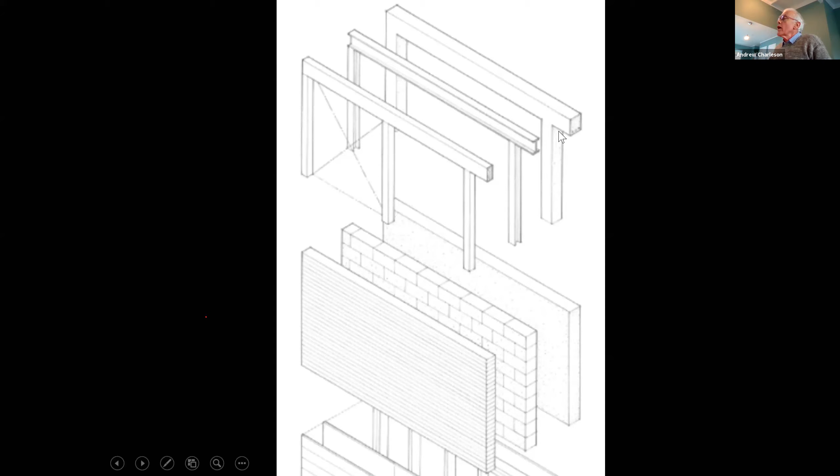And finally, we've got the structure here in reinforced concrete: a reinforced concrete column, a reinforced concrete beam.

So these structures of columns and beams are the most simple structures that you can use to resist gravity load in your two-story house.

Now, of course, on top of each of these structures you will need a floor slab, and I'll come to that soon, so that the beams of each of these structures will support the floors that you will also be designing.

So one of the very popular structural systems to resist gravity loads throughout the world is the frame system, columns and beam. This is a system that you may want to use in your design—it's entirely up to you.

The other most popular system in the world for resisting gravity loads in buildings are load-bearing walls, and there you can see three load-bearing walls.

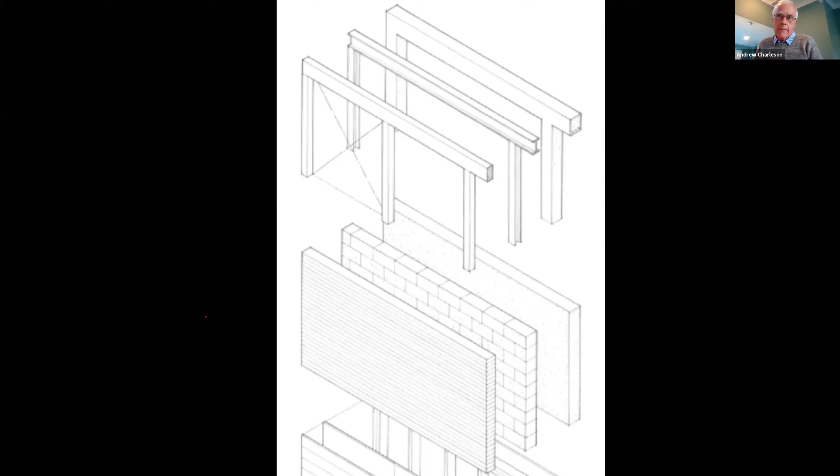Now, also from Ching, here is an example of using columns and beams to create frames. This diagram is a little difficult to understand, but basically we are looking up underneath a floor slab, and here is a column.

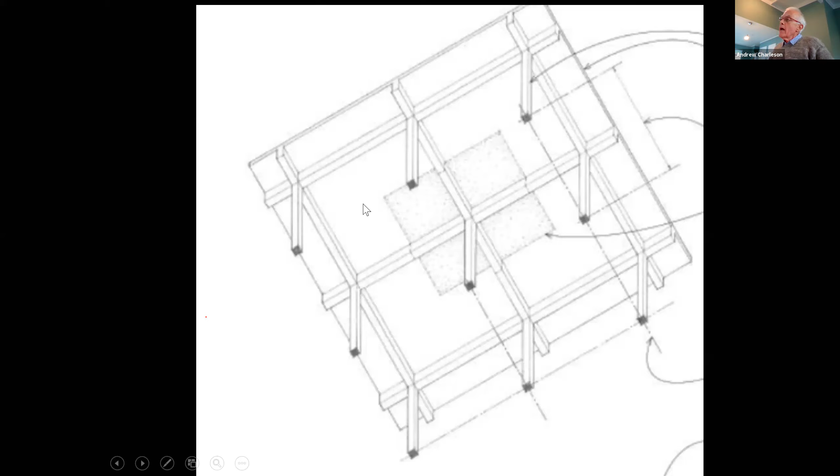These are the beams running between the columns, and this is the floor slab spanning between the beams. This is an example of using these frames on a square grid.

Now, often architects use square or rectangular grids to lay out their columns and beams.

And usually they prefer square or rectangular grids because that makes it easiest for construction. Contractors like square or rectangular grids because it's the easiest to build. But as architectural students, you have to be critical of that.

Remember, you are not designing your building for the contractor. You're designing your building for your client. And therefore, the grid should serve your program and your design concept.

I just want to tell you that the famous Japanese architect, Toyo Ito, in one of his buildings, used curved grid lines. Imagine that, all the grid lines were curved. It would have been a nightmare for the builder, but the result is an amazing piece of architecture.

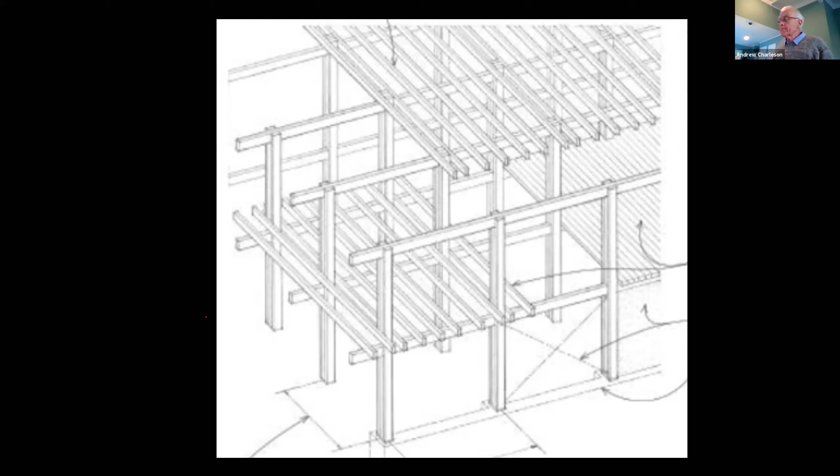So then we come to the question of how we will lay out our vertical structure, our columns. And as the designer, you have a huge range of choices.

We could start by having your structure with many columns closely spaced, and they can be uniformly distributed throughout the plan of the building.

Like, for example, you could have closely spaced columns just running along these lines, and you could have your flooring running this way.

In other words, you do not need beams running this way. Or if you wanted to, you could have your columns on a square grid like this, with beams connecting each column, and these areas would be your floor slabs.

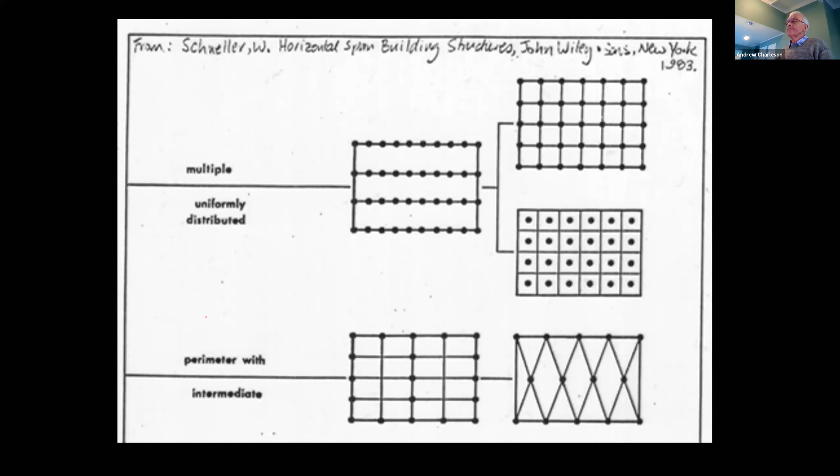Here are my final examples or possibilities. If you wanted to, when you are designing your building, you could have all your vertical structure on the perimeter. If you wanted to, you can. And so what you would do is have your columns just around the perimeter.

And then you would have beams running across your building, and maybe along your building, to support your floor slabs and your interior walls.

Or if you wanted to, you could have just 4 columns in your building, in your house project. Imagine that, just 4. That would be amazing. And that could be a very good idea if, for example, you were interested in maximum transparency.

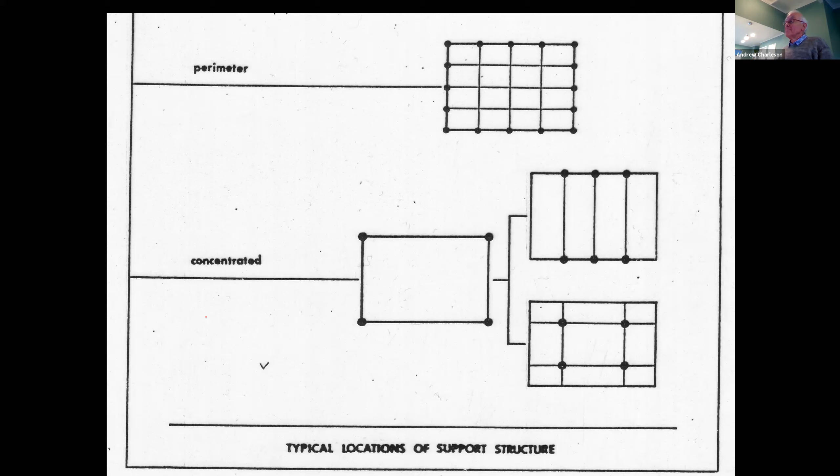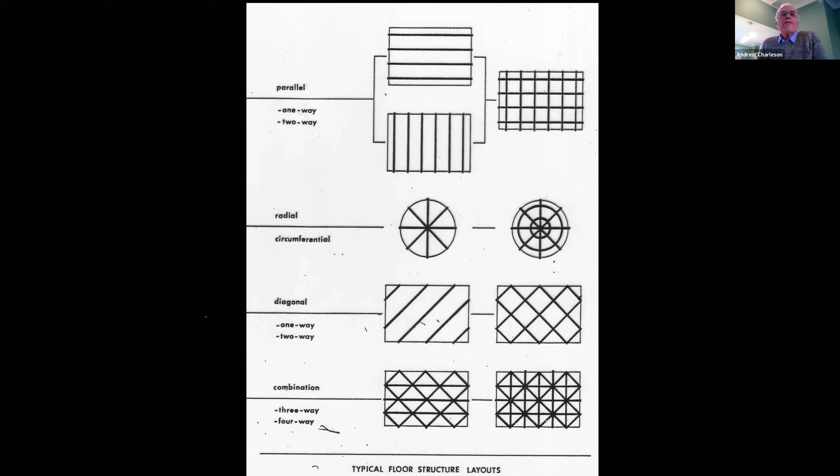And here are some other ideas in terms of beam layout. And you can see that it's possible to have all sorts of different layouts. Like say, for example, you are designing a circular house.

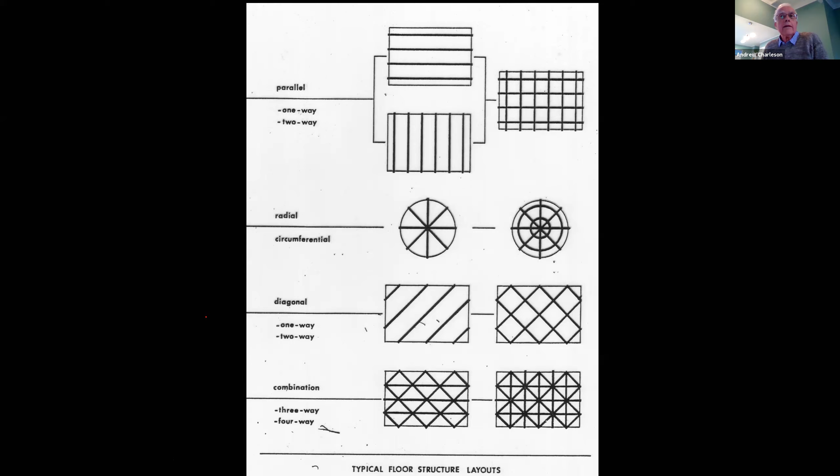Well, you could have a central column and columns on the perimeter, and you could have radial beams. And so each of your floor slabs would be designed like a triangle in plan. You'd sort of have triangular floor slabs.

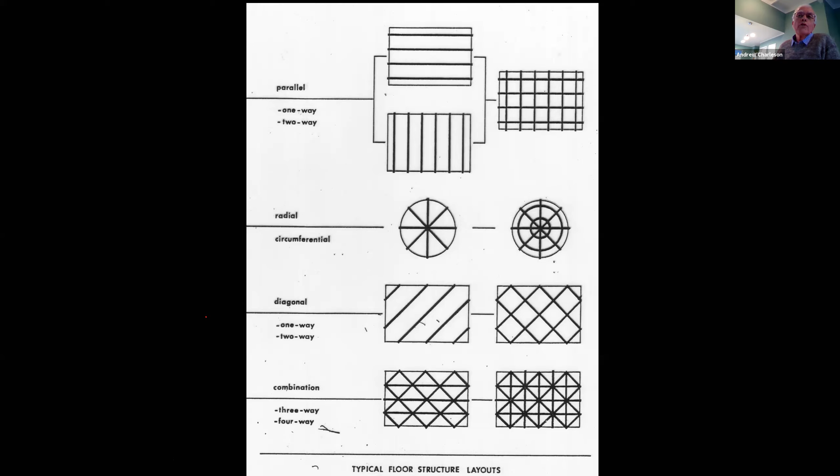And if you wanted to, there are other options for you to design your beams and columns. And so before you consider any of these, you ask yourself about what your design idea is and what your program is.

Now, this is a question that is just so important for each of you, because as architects, you've got to show the beams of your building in cross-section and in elevation. And so you've got to know what the depth of your slabs and beams are.

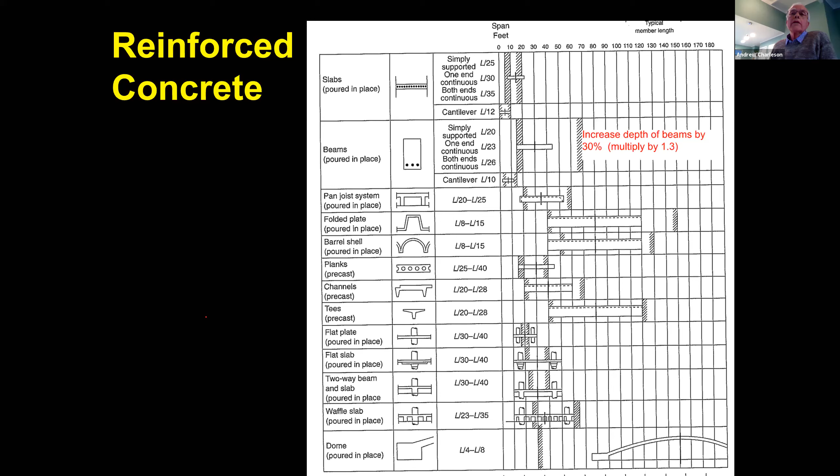Now, architects usually go to a textbook, and in many textbooks on structures, the authors present tables like this that give architects the approximate dimensions.

First of all, let's look at the slabs. Sorry, I've got to go back. So you need to know how thick your concrete slabs are going to be. So if you have slabs that are cast in place, poured in place, or cast in situ, that's the reinforcing steel in the slab.

If the slab is very simply supported, then the thickness of the slab is the span divided by 25. And I would suggest that is what you use in your design. Don't worry about this, it's a bit complicated. Whenever you have a floor slab, its thickness is the span divided by 25.

So if you have a slab spanning 5 meters, it will be 20 centimeters thick. If you have a slab spanning 2.5 meters, it'll be 10 centimeters thick or deep. And so that is the simple rule of thumb. That is all you need to know to work out how thick your slabs are.

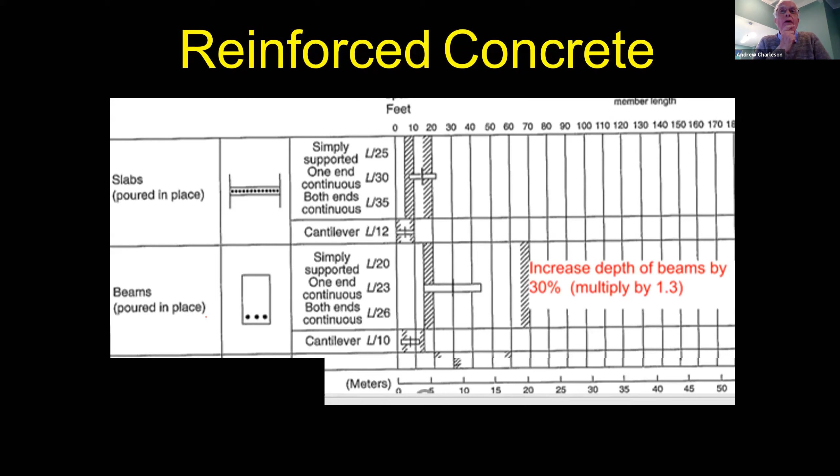I'm sometimes confused about the table, how to read it, like this one, for example. But in the book, on page 99, about the spanning system, the table is like... maybe I would like to share screen? Yes, okay, I will stop Andrew's share screen, and now you can share your screen, Shahla.

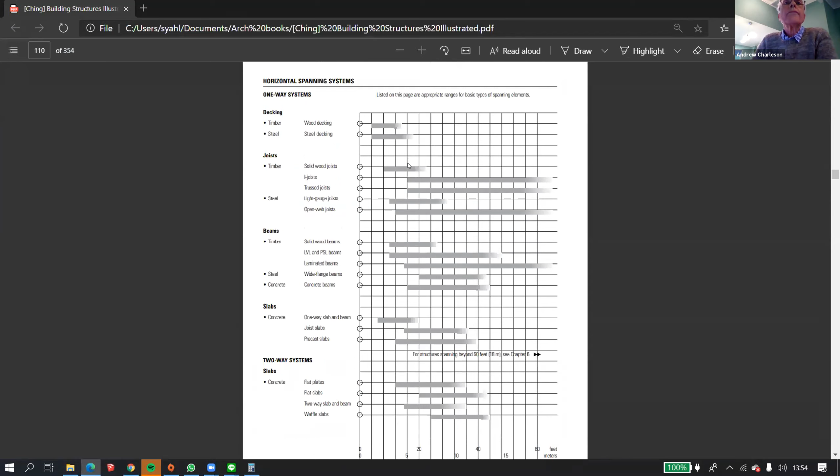Oh yeah, thank you, ma'am. Like this one, Mr., I'm still not really understanding how to read this type of table, because it would be really helpful for me in deciding about the spanning maximum and minimum distance. Yeah, that's my question.

Thank you. Okay, well, thank you. That's a really terrific question. Could you just show me the title of the diagram?

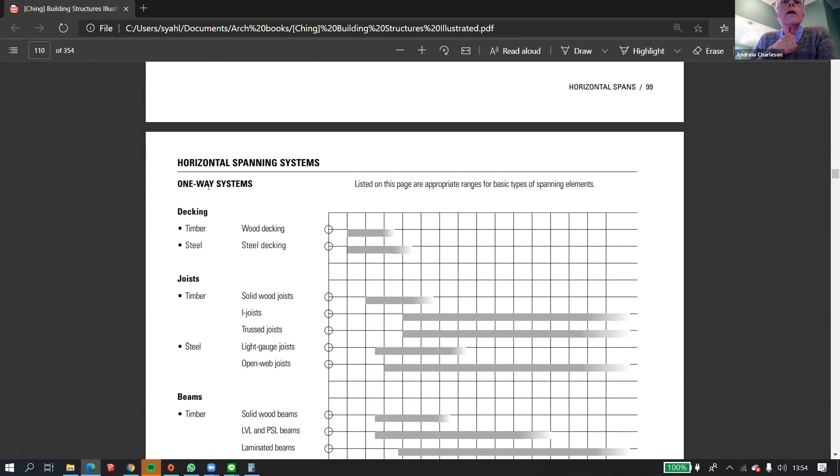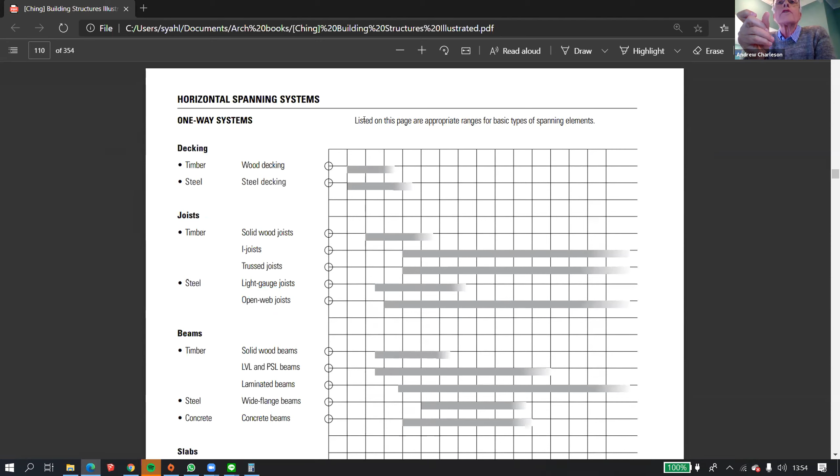So this diagram gives you the approximate ranges for each of the structures. So if you look at concrete beam, if you can scroll down a bit to concrete beams, yeah, that's great. Now you'll see there that under concrete beams, you've got that grey line. That grey line represents the sensible limits of using concrete beams. So it's saying that if you're using concrete beams, they should be no shorter than about 5 meters, and they should be no longer than about 13 meters, which is what I was saying before.

So, like take concrete slabs, say one-way slab and beam, or above, concrete slabs. Atasnya?

Yeah, there, slabs there. Concrete, one-way slab and beam. Yeah, that's it. Well, you see, it typically should be in the range of about 2 meters to about 6 meters. Because if it's spanning further than that, it'll be too thick and deep and heavy. And so this is like practical guidance for you.

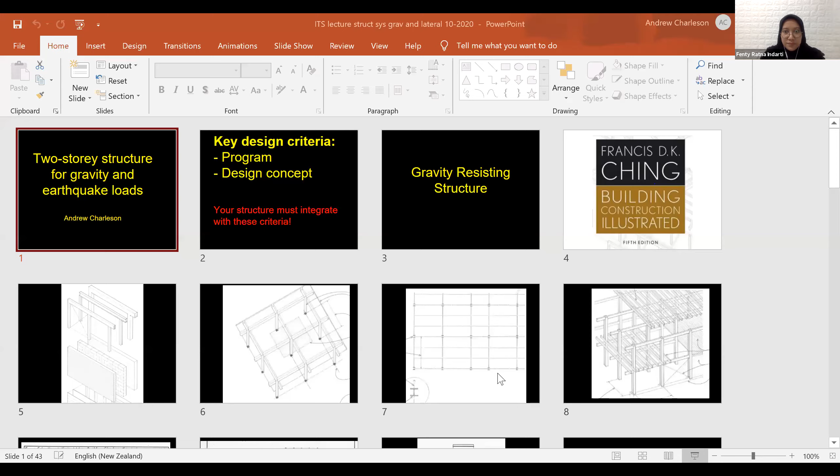Okay, so now I'm moving on to the more difficult part of the structure of a building, and that is for it to resist horizontal loads like wind and earthquake. In Indonesia, your wind loads are not so serious, so the big problem for you is designing against earthquake.

I'm sure you are aware of some recent earthquakes in Indonesia that have caused many buildings to collapse, like for example on Lombok and Palu, and other areas of Indonesia. The only area in Indonesia that is quite safe from earthquakes is Kalimantan. But Sumatra, Java, Bali, Nusa Tenggara, Sulawesi, Irian Jaya are very seismic areas. It's so important that we design our buildings so they won't collapse in an earthquake.

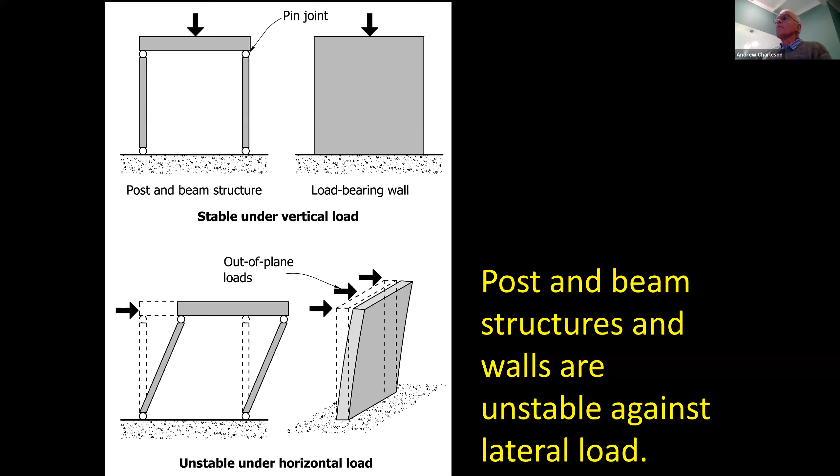Now, as architects, you have three structural systems that are suitable for resisting earthquake load. Just three. You have shear walls, which are the best system. You have braced frames, which are like triangulated frames. And finally, you have what we call moment frames, columns and beams, like a framework.

As an architect, you have to choose one of these structural systems in each of the primary orthogonal directions in your building plan, and you can have as many elements as you need. For example, in this building here, I am using shear walls in both directions. In the X direction I've got 2 shear walls, and in the Y direction, these 2 walls.

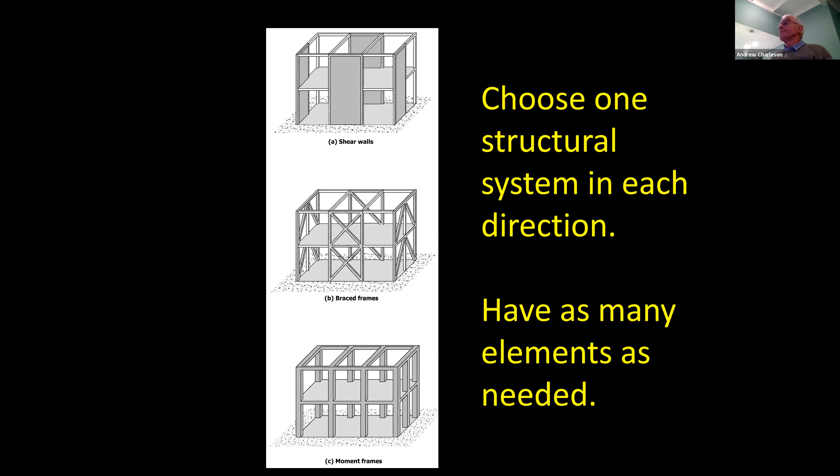Now I'm going to talk briefly about each of these structural systems. This is the best structural system. It's potentially the strongest and the safest, shear walls. It's very important that the shear wall starts from a strong foundation and rises continuously up to roof level. Most shear walls in the world are vertical, but it is possible to have them slightly inclined.

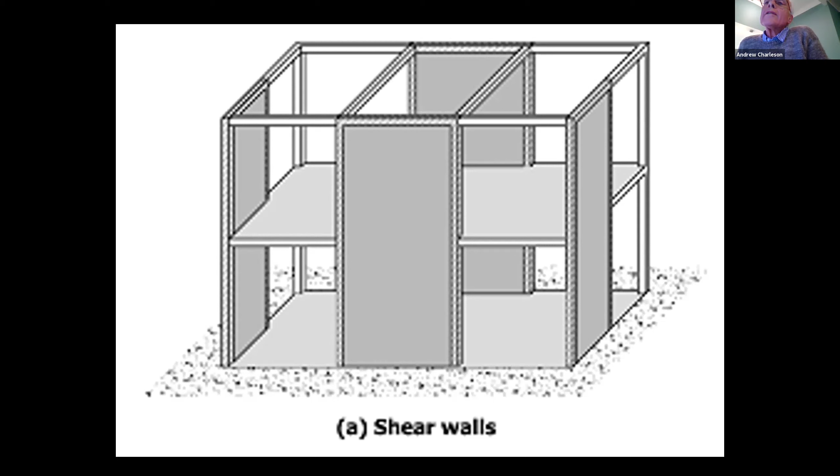Have you heard of the architect Zaha Hadid? She would never use a boring shear wall like in my diagram. She never did a shear wall like that. All her shear walls are slightly inclined because she is so interested in communicating the idea of dynamic. So I'm showing you some very boring shear walls today, but I want you to transform them and make them more interesting according to your design idea.

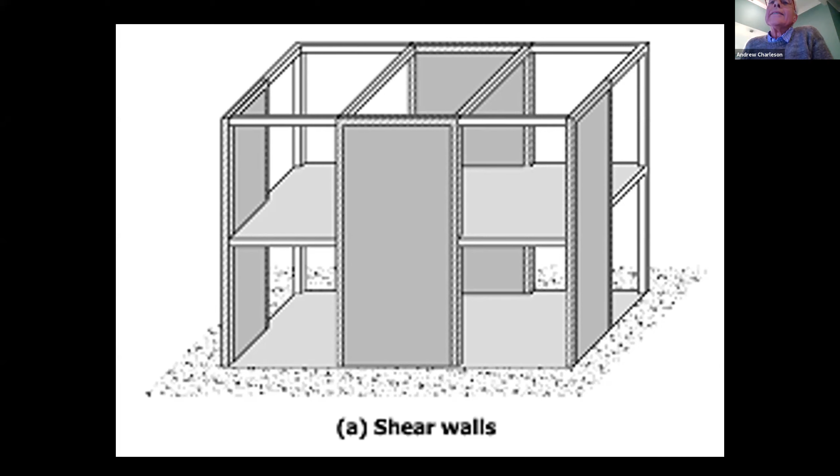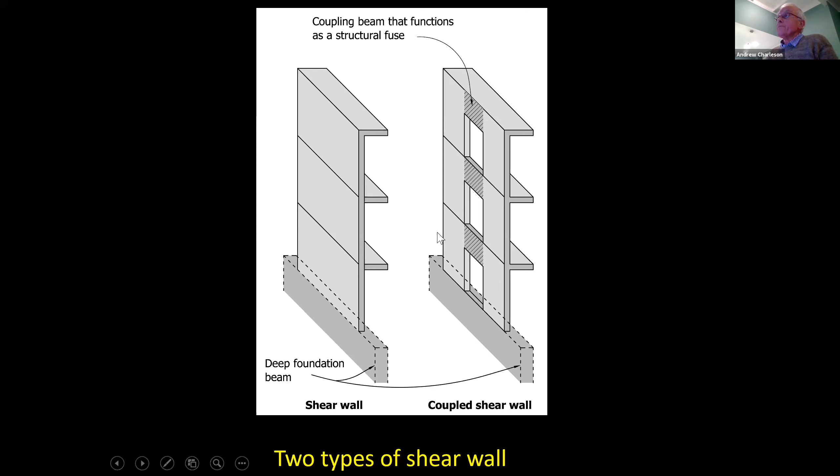In countries like Indonesia, a very common type of shear wall that is used for housing, say up to 2 stories, is called confined masonry shear walls. And many houses in Indonesia rely on these types of shear wall for their earthquake resistance.

In confined masonry shear walls, the masons build the masonry wall and then the reinforced concrete columns are cast, and then the tie beams and the floor slab. Confined masonry walls are really good for low-rise construction to resist earthquake. Really good. And as I say, that is what is used in many houses in Indonesia.

The alternative type of construction is to design reinforced concrete frames, beams and columns, and then after the concrete has hardened, after the concrete is set, then you come and put infills in, infill walls. Now, this type of construction is more dangerous because in an earthquake, the infills can fall out and kill people. And you see that many times after earthquakes.

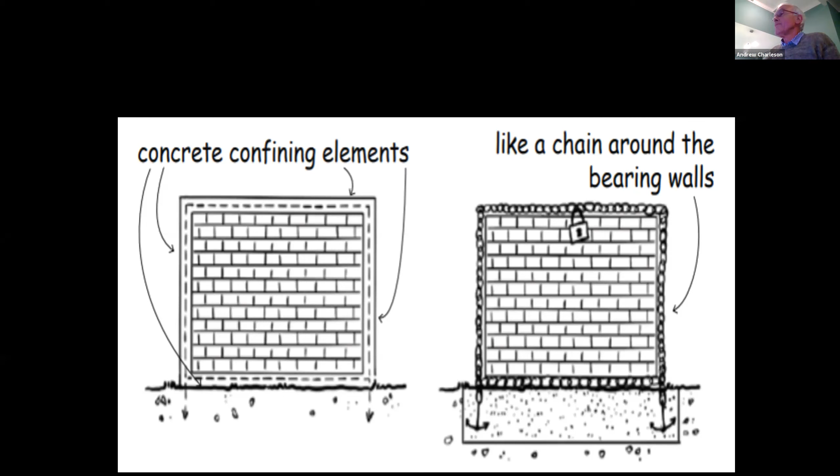So the tie columns and beams are absolutely essential. And so this is a very simple confined masonry house. Here is a tie column, here's the tie beam, and another tie column. And your masonry is actually load bearing for gravity. So the beam is not going to bend. It's there to help resist the earthquake forces, because the weight of your floors will be taken through the masonry primarily. This is how, as I say, most Indonesian houses are designed.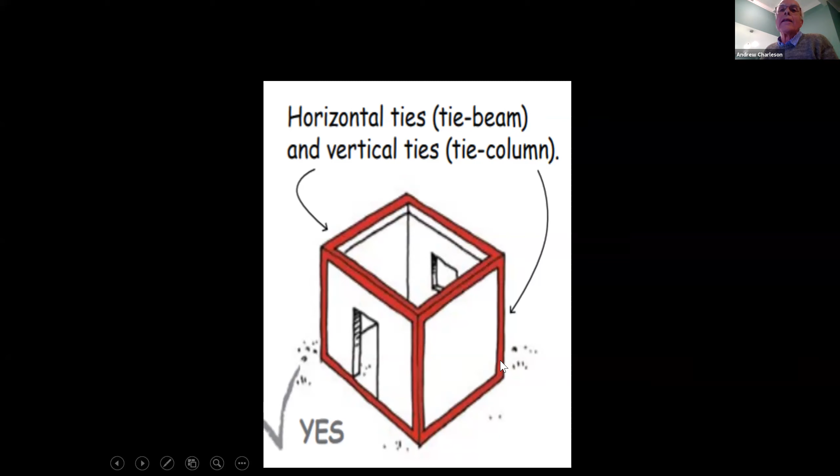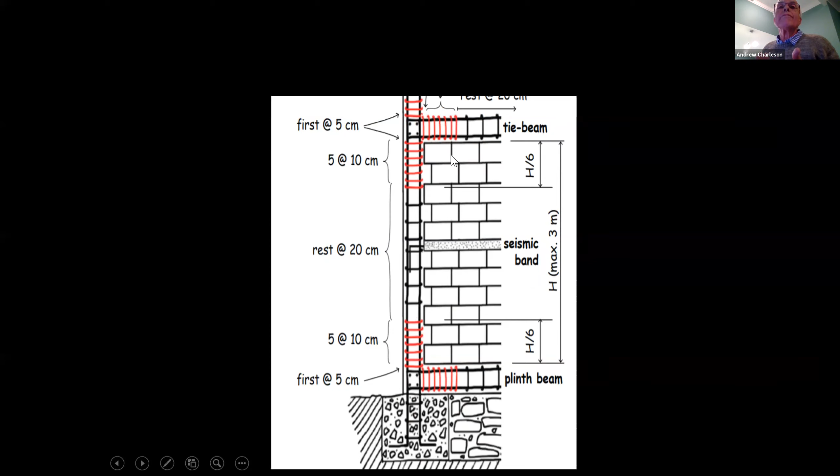And so this is the section through the foundation. You call it, well, just the foundation beam. There might be a plinth beam. Here's a tie column with reinforcing bars with special sengkang or ties. Here's the next beam up here. But anyway, you don't need to worry about these details. This is not so important for design and construction, I don't think.

And so after the walls have been laid, after the masonry has been laid, here are the concrete columns about to be cast. Here's the formwork for the column and the beams. And here is the floor slab will be poured across here, or the roof slab.

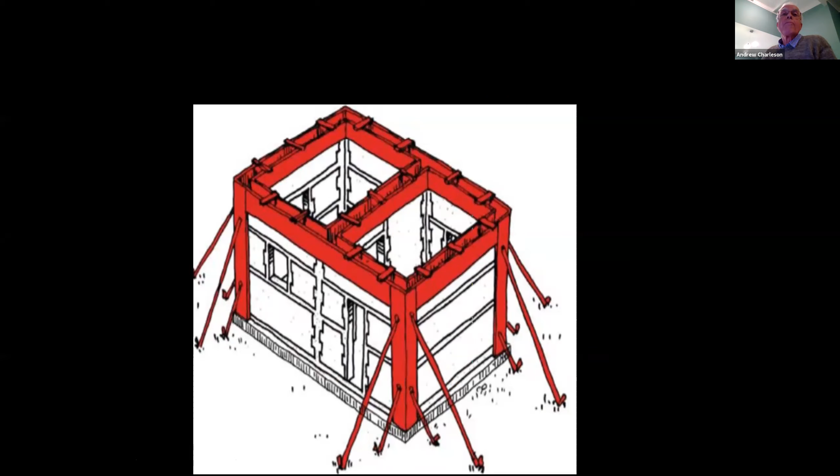Here it's going to actually be, I think, a 3-storey confined masonry building. It's a university hostel building. There are tens of these buildings in India.

You can see the masonry and the reinforced concrete columns. Here the wall has been laid by the masons. All the bricks are there, and the next stage is to cast the column and the tie beam on top. So this is a very strong shear wall, three stories high.

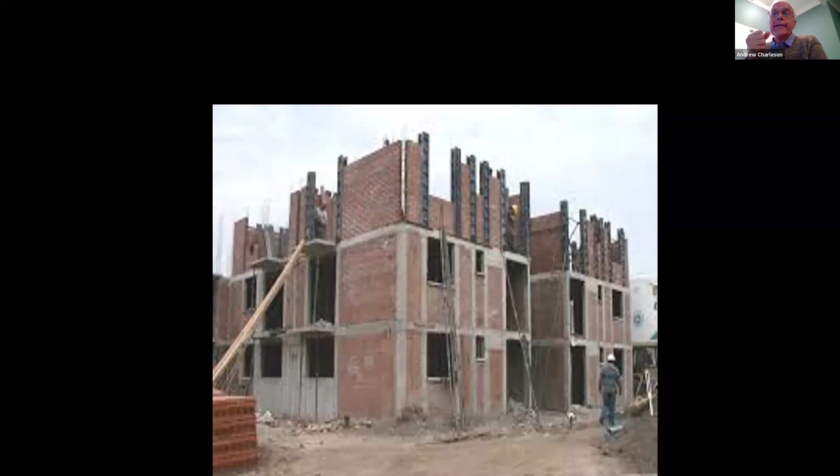Here's some buildings, some of them I think are from Indonesia. This is probably an Indonesian building. Here the bricks, a horizontal lintel tie, the tie column and the floor slab and tie beam at the top there. This is the type of construction you will probably see if you visit a building site around Surabaya. That's my guess, but maybe you'll have some questions about that.

Oh, this is an Indonesian house. This is Pakistan, and the others are from Pakistan. But this one is an Indonesian house. The bricks, the confining members create the shear walls.

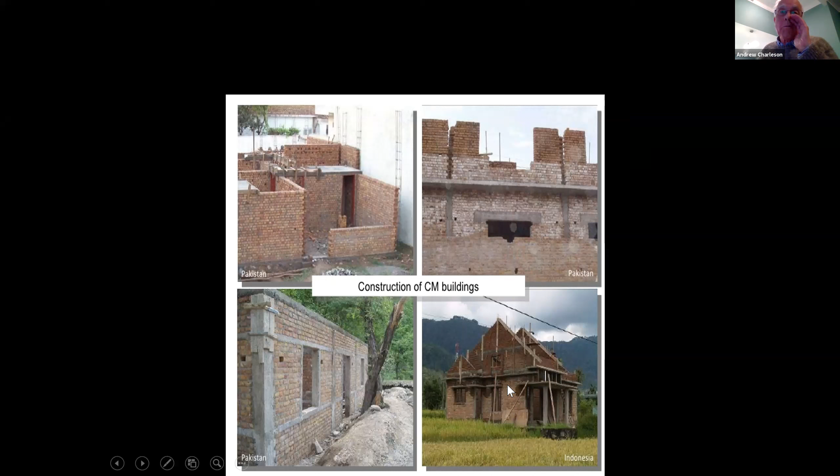In an earthquake, the earthquake acts at the floor levels mainly of a building. The earthquake shakes the building horizontally, and the shear wall resists the earthquake by forming diagonal compression struts like this in the wall. So during the earthquake, force in this direction pushing from left to right causes inside the wall a band of compression resisting the earthquake force, and at the same time there'll be tension in this column.

It'll actually go into tension just for those seconds during the shaking. After the shaking, there won't be any tension in that column, it'll have some compression. So the masonry wall transfers the earthquake force in compression down to the ground, and when the force is in the ground, the building will be safe.

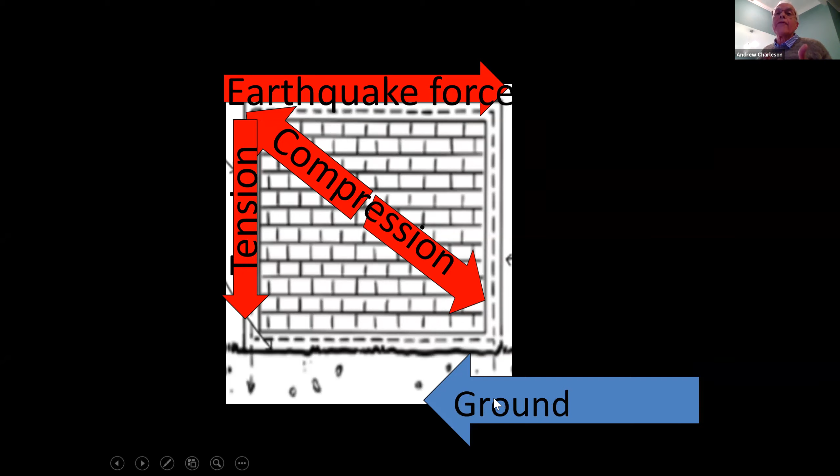Now, if you want to use a confined masonry shear wall, it's very important to have no openings, no windows, no doors in that particular shear wall. Otherwise you cannot form the diagonal compression struts. So some of your walls are not allowed to have any big openings like this, just some of them. Many of your other walls can have openings, but the walls that are meant to resist the earthquake must not have openings. Otherwise they're too weak and they will break.

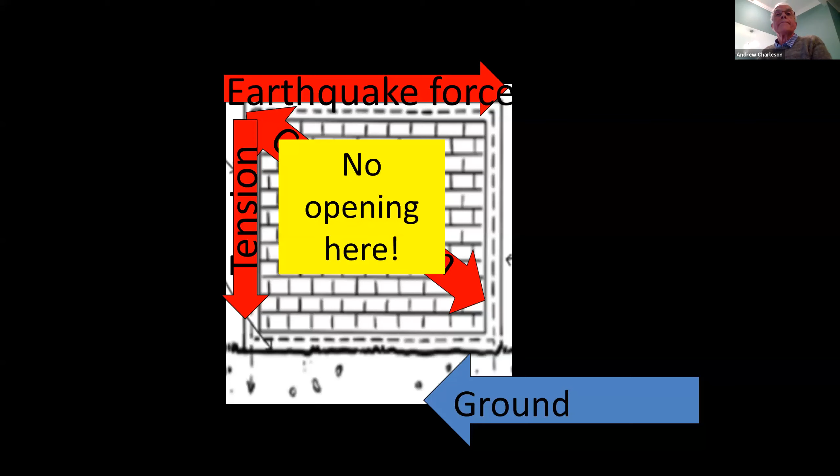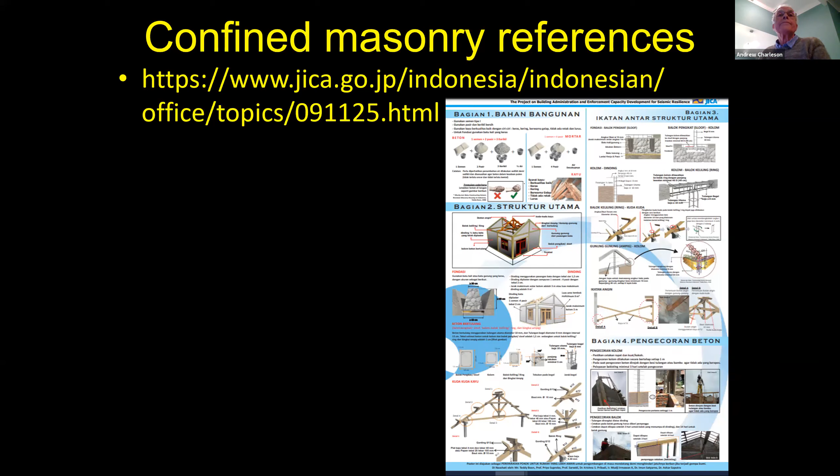Another very good reference for you is found on this website, which gives you the principles of confined masonry construction. And if you want to be more confident about it, this is a very excellent book written for architects and builders. It's not too technical for you, and you can download it or read it online at this website, the World Housing Encyclopedia.

So that's all I want to say about shear walls. I could say that for low-rise construction in Indonesia, confined masonry shear walls are very suitable. For medium-rise and high-rise construction, you should use reinforced concrete shear walls, they are a lot stronger. If you are building in wood, you could use plywood shear walls. Like in New Zealand and in California, many buildings use plywood or even gypsum plasterboard shear walls because the construction is so lightweight.

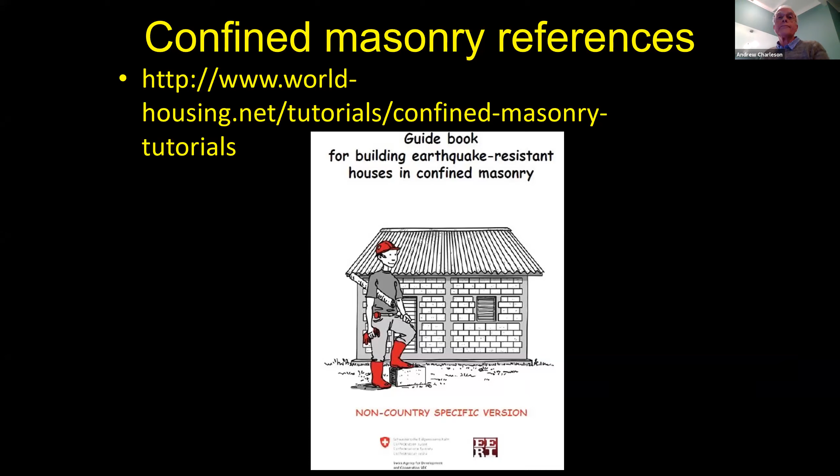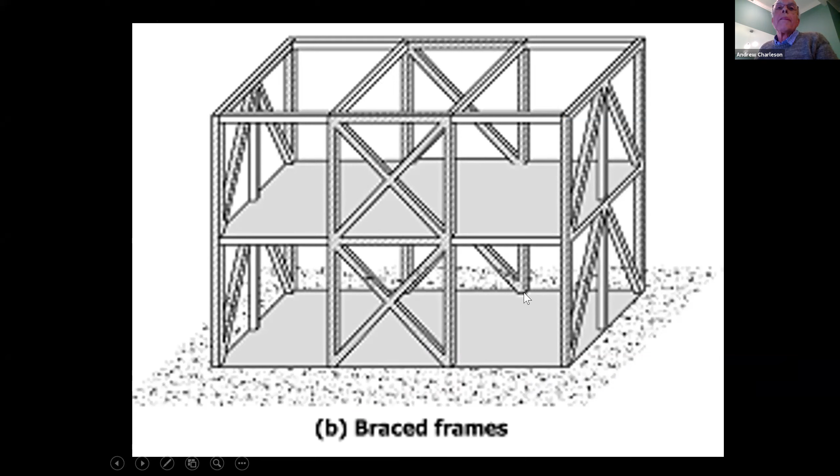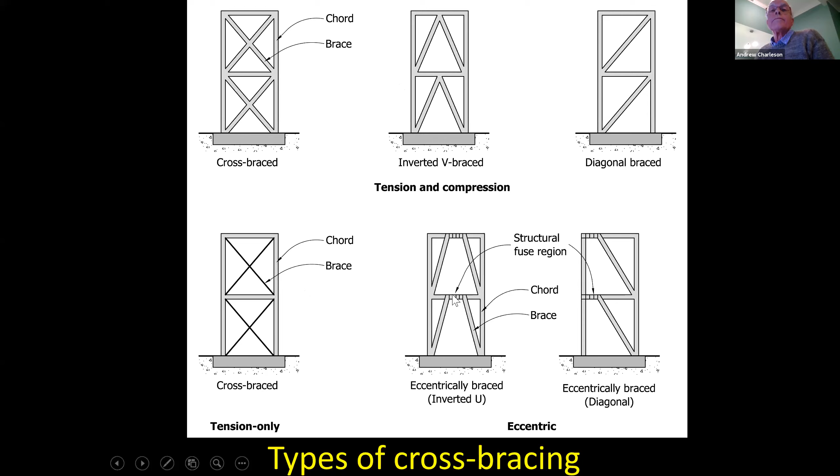Okay, the next system to resist earthquake is the braced frame. Here's a building with braced frames resisting earthquakes. The braced frame is based on triangulation, the elements must always form triangles, except that it is quite popular to use eccentrically braced frames, where we create structural fuses in these regions. Braced frames can be in any material, like timber, steel, or reinforced concrete. It's quite difficult to make in concrete because the formwork is difficult, but you can do it. This could be in concrete, this could be in concrete, and these ones need steel, tension-only steel rods, and these have to be in steel. So those are your braced frames.

Now, finally, moment frames. This is where you resist your earthquake forces purely by a framework of columns and beams. Each frame must have beams at each level, and you must have your columns, and at every joint connecting column to beam it must be very strong and rigid - in other words, the opposite of flexible. Very strong and rigid joints.

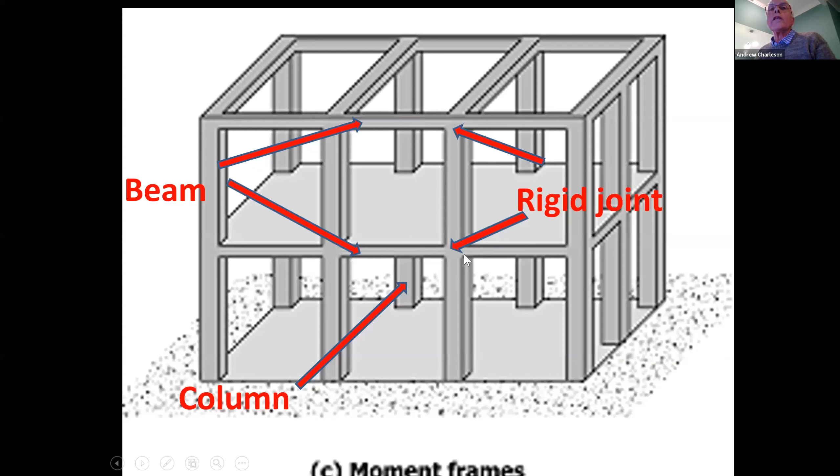If you're using moment frames, this is what a frame looks like in plan. This frame is strong to resist earthquakes in this direction. So the column has to be wider in this direction, and here's the beam. So that is a 1 bay moment frame in plan, in concrete. In steel, it looks like that. There's your I column, your I beam, your I column.

If you had your columns like this, for this moment frame, this would be a mistake, because in this direction your columns are very weak. And so this would be a really bad design. Also for a steel frame, this is a very bad design, because your column is strong in that direction, but weak in this direction.

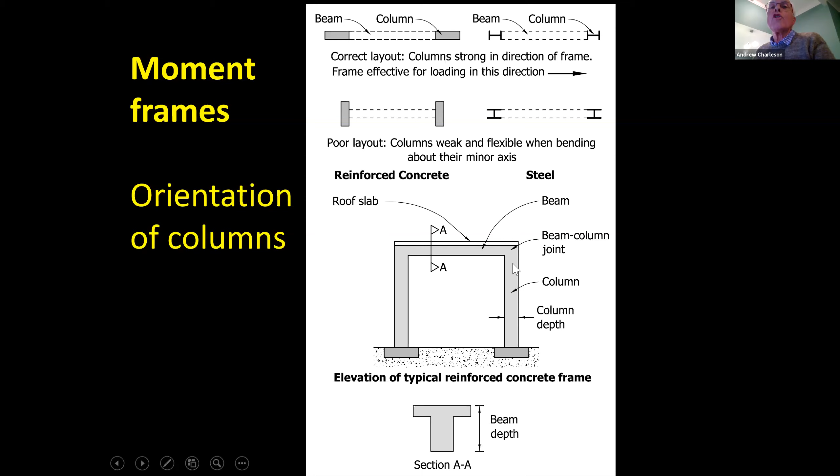Here's your beam in cross section. This is your beam connected to your floor slab. It's like a T beam, isn't it? That's your beam depth. That's got to be at least span divided by, say, 12 or 15. And here is your rigid beam column joint that has to be very strong with lots of reinforcing steel in it.

So if you are using moment frames in your building, you can choose to have as many frames and bays that you want, as many as you want to suit your design concept and your program, and to avoid the columns and beams becoming too large in cross section. So this is your choice. There's an infinite number of options.

I've just designed these two buildings to show you. Like in this building on the left, it's 1, 2, 3, 4 stories high, and then it's got a roof on top. In the Y direction, I've got just 2 frames, this frame here and this frame here. So they are strong in the Y direction. And each frame has 1, 2, 3, 4 bays. Okay, 4 bays. That suits my program and my concept.

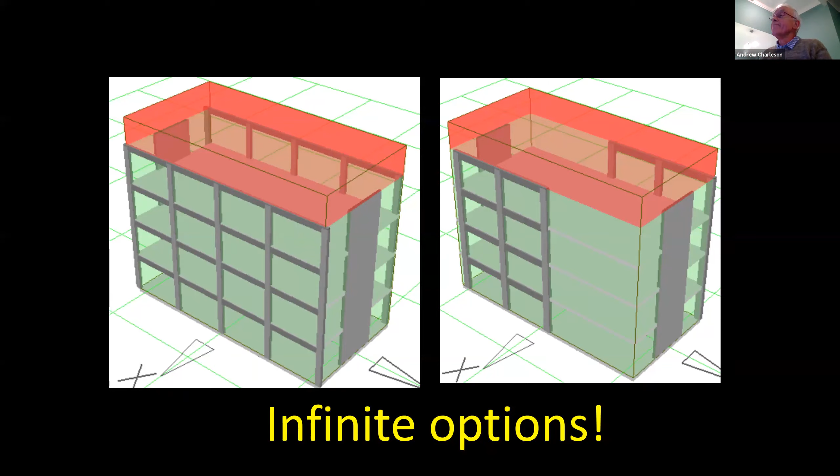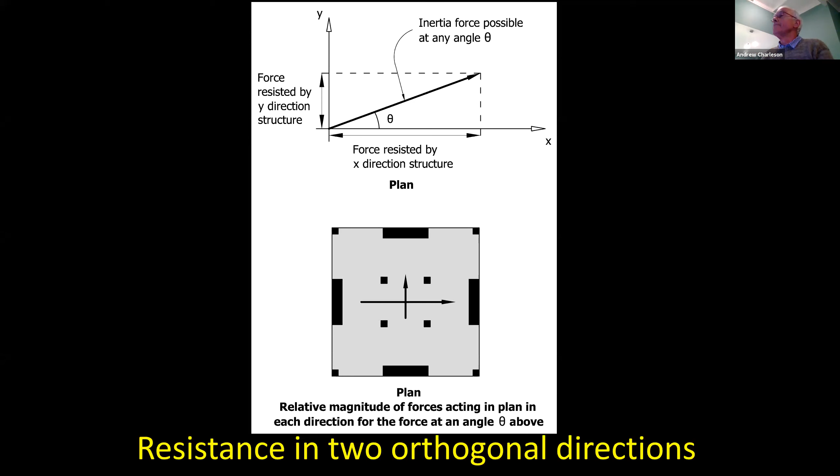The next principle is this: it's about torsion. During an earthquake, buildings will twist in plan during the shaking. Imagine my notebook as a building in plan - in plan, it will always experience some twisting or torsion. So this principle is to prevent torsional problems.

The principle is that, first of all, we need two structures in each direction. In this building, in the X direction, I've got a shear wall there and a shear wall there - I've got two. And they must be separated in plan so that they provide strong resistance against twisting. For the walls resisting forces in the Y direction, this wall here and this wall, it's separated in plan by that dimension.

Well, sorry, I'll just go back. So those are really the main principles.

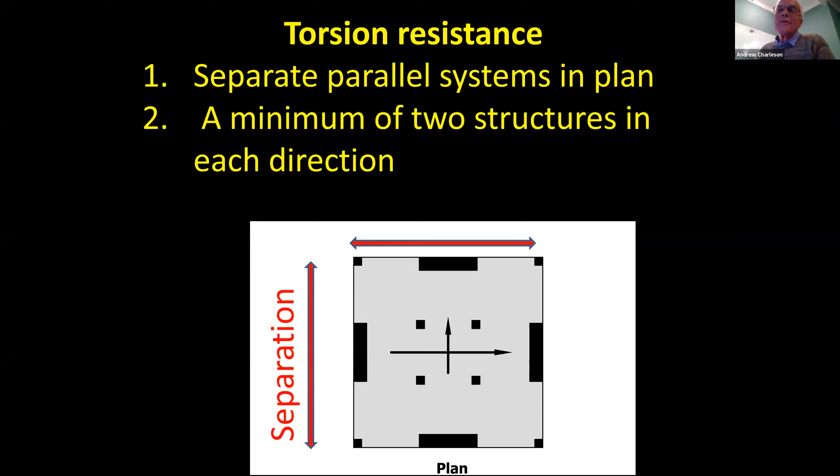But there's one question that you need to be asking me quite desperately, actually. This is the question that each of you need to ask someone - you can't ask me because I would be too busy. So this is the question for you: how much structure do you need to resist earthquake?

I've told you how to resist it using shear walls or braced frames or moment frames. But the tricky thing is, how many shear walls do you need, and how long do they need to be? This is the really difficult question, because it depends on lots of different factors, like how tall your building is, how heavy it is, whereabouts in Indonesia it is sited, and what type of soil it's on. All these questions affect how much structure you need for your building.

Now, the best way to answer the question is to use this rule of thumb software called Resist, that you can download for free from this website. If you haven't got any tutors to help you with the software, this software is very, very easy to use. I wrote it with a colleague for architects and architectural students like you.

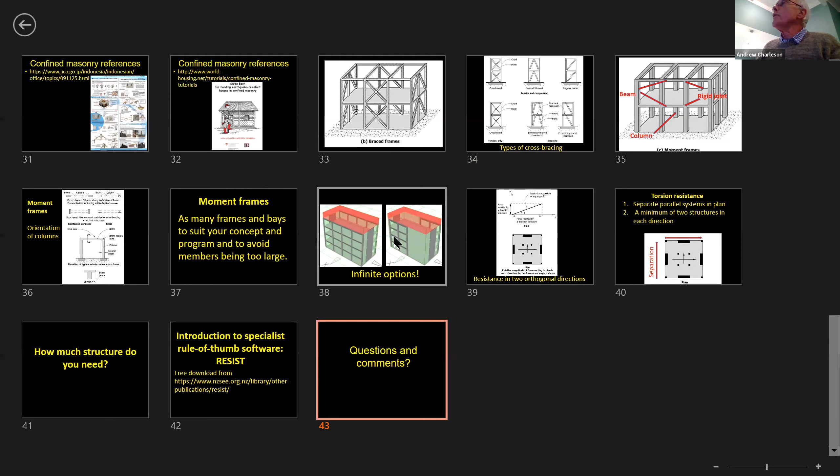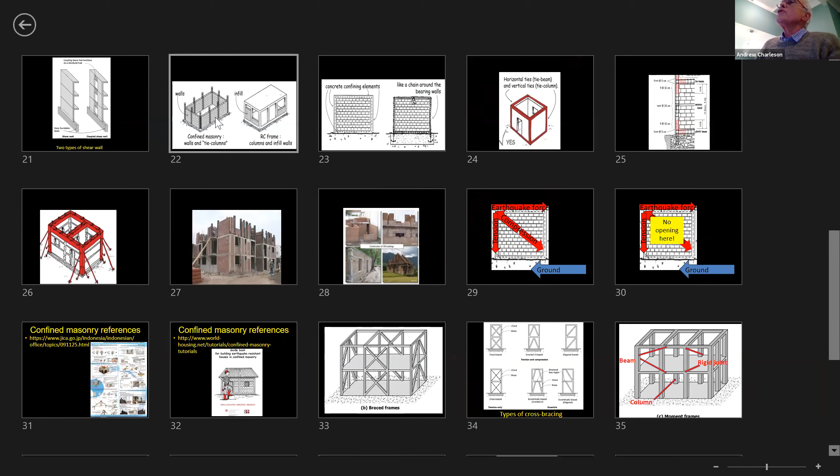Okay, look, that's a really good question. I'm so pleased you asked that question. The difference is in the method of construction. Oh, okay. Because you see, for confined masonry, you build your walls first, and then you cast your concrete columns. So when you cast your concrete columns, the concrete can bond to your bricks very strongly. And so the bricks can't fall away from your column or beam, because the concrete has got this really strong bond.

But when you have your frame built first, then you construct your infill, you've only got a very weak connection between your brickwork and the concrete frame, because you've just got some mortar that is very weak. When the building gets shaken in an earthquake, that mortar actually falls out, and it means the infill can just fall into or out of the building. So look, that's a terrific question, and I hope I've made it a bit clearer for you.

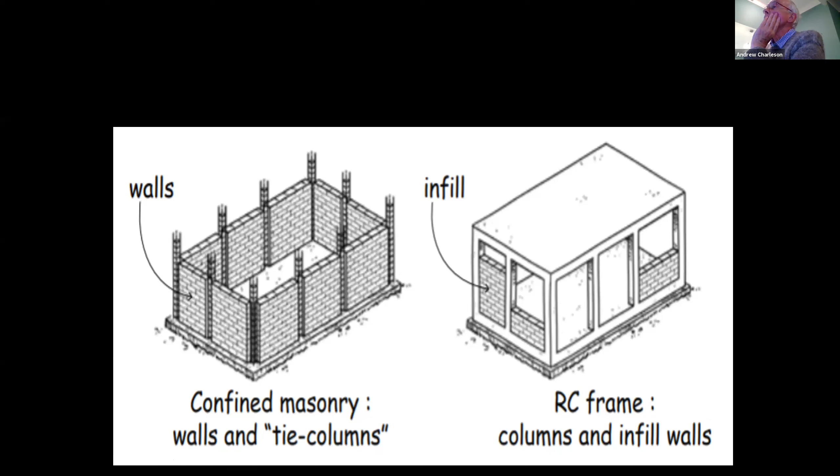Earlier in the lecture, you said that we shouldn't be enslaved by the boring structure to satisfy the constructors. From my understanding, there is no limitation to imagination, right? But there's a limitation in making it a reality, such as economical limitation. What I want to ask is, what part of the structures can we change or adjust to fulfill the economical limitation while still making it a strong structure and expressing our concept and ideas?

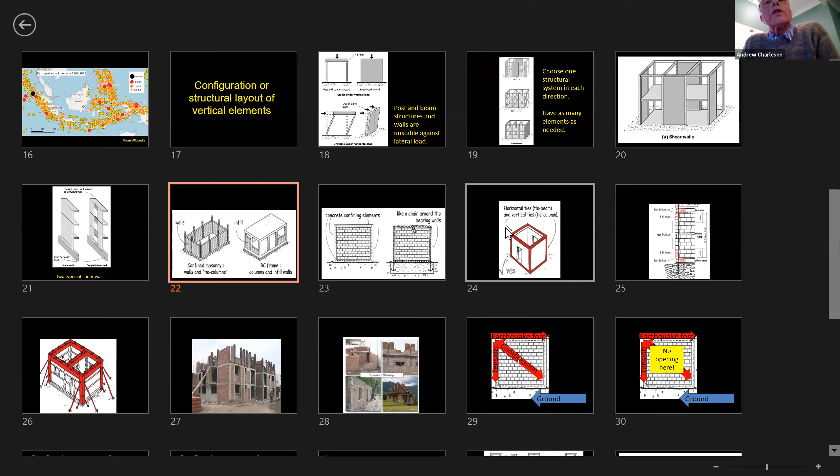Thank you. Well, you have to look at your design brief. While you're in a school of architecture, my opinion is that you shouldn't need to worry about the cost of your building. During your time in the school of architecture, it's about ideas, and as you said, there's no limit to ideas. So you should be brave and push yourself to express your design concept and create maybe an innovative program, a spatial layout for your design. Having done that, you bring in your structure to provide for gravity loads and for lateral loads, and you don't need to worry too much about the economy of your building, unless that is part of what your lecturers have asked you to do.

And if your lecturers are stressing economy, then I'm very sad to say that you will have to produce a very boring building. You will have to produce a building that is cheap to construct, and that will mean a rectangular or square grid of columns. It'll mean that everything will have to be really basic and simple. Sadly, it's a bit like motor cars, isn't it? If you want an interesting motor car, you can't buy the cheapest, the very basic vehicle. But if you want something with more design flair and design excellence, then you have to pay a bit more money in order to get something with that better quality. Architecture is just like that. So I think that's about all I can say. There's no easy answer.